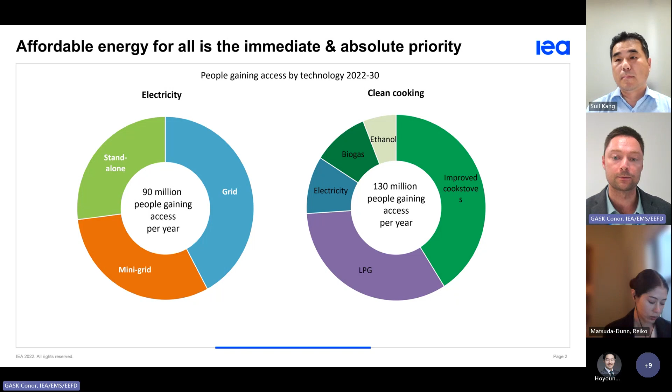Achieving full access to modern energy in Africa by 2030 would require investment of $25 billion per year. This is comparable to the cost of building just one large LNG terminal. Current investments fall far short of these levels. In 2019, for example, this amounted to just 13% of levels needed to meet the goal by 2030. Ramping up access to investment requires programs on the ground to mobilize a large number of smaller projects, which individually are difficult to fund.

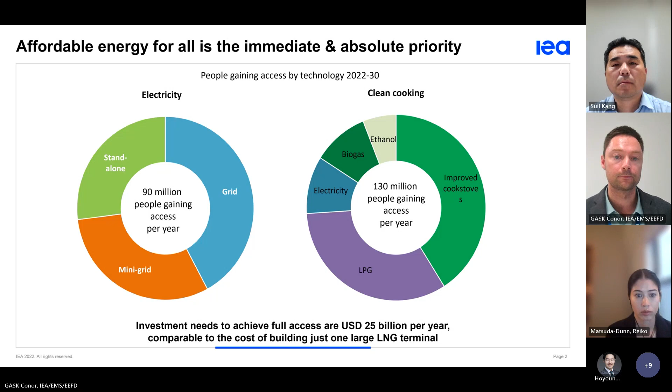Looking at growth in electricity demand over the coming decade, Africa is set to experience an unprecedented increase in energy demand, driven by rapidly growing economies and populations, rising incomes, and significant infrastructure expansion. Energy demand in industry, freight, and agriculture is expected to increase by almost 40% by 2030. As climate change and urbanization drive up the need for cooling, electricity demand for household appliances could more than double by 2030.

Industry accounted for 2/3 of energy demand for productive uses in Africa in 2020, with services made up of commercial and public buildings and desalinization contributing 1/4 of this demand. Total energy consumption for productive uses across Africa rises by 33% based on our projections in the Sustainable Africa scenario, with the use of almost all major fuels increasing in all 3 productive sectors.

Electricity consumption increases significantly in both industry and services, where electricity meets almost half of total energy needs by 2030, and more than 3/4 of the rise in energy use driven by increasing use of electricity for space cooling, lighting, and appliances. The increase in energy use in our scenario is tempered by the adoption of strong measures to enhance energy efficiency.

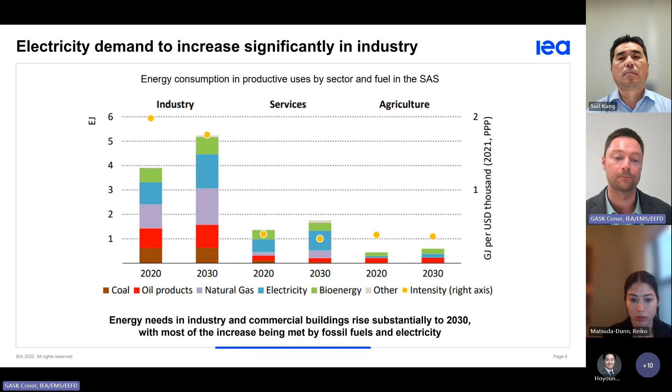Africa's 300 million households accounted for 56% of the continent's total final energy demand in 2020, despite 120 million of these households lacking access to electricity and 200 million being deprived of modern, clean cooking solutions. Over the decade to 2030, the growth in household demand for energy services is set to outpace population growth, as rising levels of access to electricity and rising incomes drive up ownership and use of appliances and equipment, as well as other uses of energy.

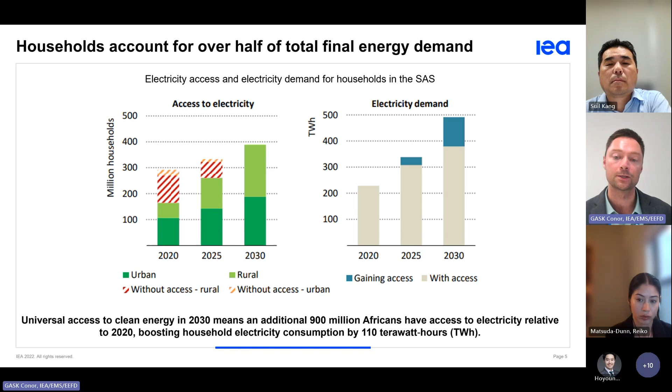In our Sustainable Africa scenario, most of the growth in demand is met by electricity, and its share of total household energy use rises from 6% in 2020 to over 25% by 2030.

Looking at appliances, lighting, and air conditioning and their energy use, rising incomes and expanded access to electricity will drive growth in this sector. We expect that ownership of air conditioners will jump by around 17 million to 40 million, and electric fans will increase to around 340 million between 2020 to 2030. The stock of refrigerators will also increase by over 80 million and washing machines by 20 million.

As a result, electricity demand for these and other household appliances and equipment more than doubles from around 160 terawatt hours to 350 terawatt hours. Growth is fastest in sub-Saharan Africa, with electricity use for appliances and other electrical equipment quadrupling by 2030.

In contrast, however, to total electricity use, average consumption per household that has access to electricity actually falls slightly between 2020 and 2030. This we expect is due to a rapid implementation of mandatory minimum energy performance standards and also stronger building codes across all appliance types and across building sectors in almost all countries on the continent.

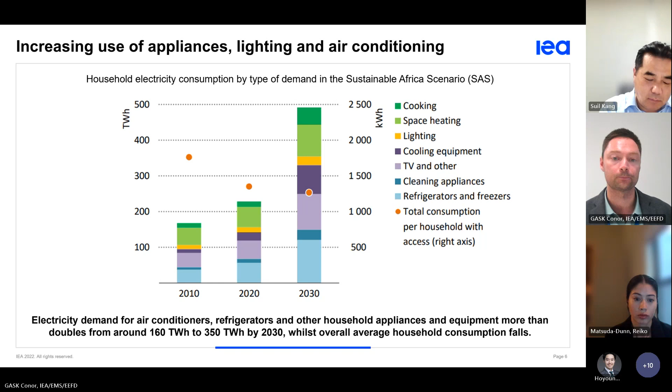Another key challenge which we see in Africa is looking at the resilience and sustainability of the power system. And we have seen growing network losses leading to increased strain on power systems in Africa as well as globally in recent years. Massive investment in Africa's grids is critical to improve system reliability and expand access and facilitate the integration of variable renewables.

Extremely high network losses across Africa, which averaged around 15% in 2020, were almost twice the global average of 8%. And countries often lack the tools to monitor the condition of the grids and to accurately assess the location, duration, and cause of blackouts or brownouts.

Reliability is particularly important to attract industry and investment in industry, as African enterprises experience power interruptions of more than 50 hours a month on average in 2018, a loss of 25 days of economic activity per year. So addressing power system sustainability not only can improve the economic growth, but also can improve the investment prospects for industry in the future in Africa.

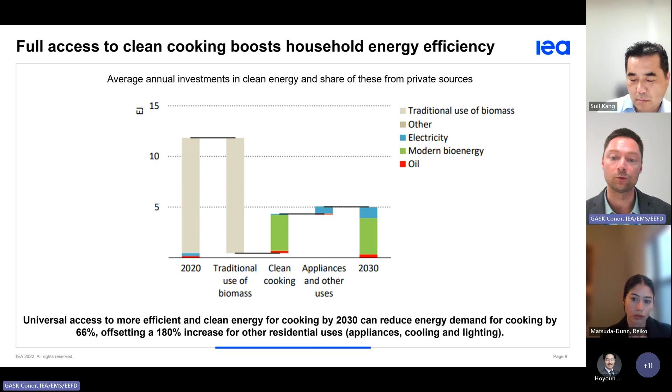Another area which the IEA has been looking more to in recent months is clean cooking. The traditional use of biomass dominates residential energy demand in sub-Saharan Africa today, with more than 80% of the population reliant on it. Universal access to more efficient and clean energy for cooking by 2030 in the Sustainable Africa scenario reduces total residential energy demand in sub-Saharan Africa, as efficiency gains more than offset the overall increase in the underlying demand for cooking. Energy demand by 2030 could drop by 66%, more than offsetting an increase in use for other residential uses, such as appliances, cooling, and lighting.

One of the key challenges we have seen is investment in energy efficiency in Africa, which in the past has been overlooked. We believe that energy efficiency needs to play a key role in Africa's energy economy as demand expands, but it is not yet getting enough priority. Energy efficiency spending increases 7-fold by 2030 in our Sustainable Africa scenario, in areas such as efficient green buildings and consumer appliances like refrigerators and air conditioners.

Increased investment in industry as well will also be critical to reducing overall energy demand. Investment in energy efficiency, electrification, and renewables for end use in Africa has been relatively static for more than 5 years, accounting for slightly below $6 billion in 2022.

While several countries in Africa have put in place building codes and minimum energy performance standards for certain appliance types, there is still a lack of an integrated and comprehensive policy framework in many cases. In 2022, for example, MEPS and labels for air conditioners covered around 50% of final energy consumed by all such equipment in Africa, and refrigeration stood at 60%, compared to a global average for both of around 90%.

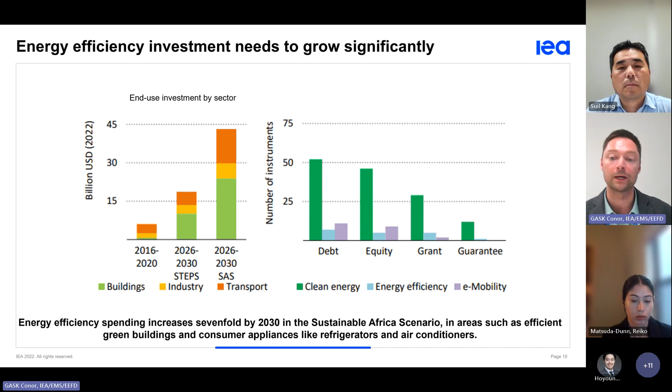Finally, we see reliable and robust grids as a key missing piece of the puzzle in driving Africa's clean energy transition and decarbonising on the demand side. Electrification of end uses and changes in demand, coupled with increasing shares of variable renewables, are creating pressures for advanced economies, emerging markets, and developing economies alike.

Due to underinvestment, electricity systems globally face a myriad of challenges, including inefficiencies, losses, congestion, and outages. Climate change is causing further damage to assets and affecting reliability. We see that grid investments rise from around $10 billion per year today to nearly $50 billion by 2030 in order to meet sustainable goals, requiring new financing models that are less reliant on limited state funds.

Many African state-owned utilities struggle with poor financial health and high system losses, which average 15%, as I mentioned before, almost double the global average. As a result, they are unable to finance the necessary expansion and modernization of grids that the influx of renewables requires. This includes expanding digital and smart solutions, which will be critical for driving decarbonization in high energy consuming end-use sectors, such as buildings and industry.

Alongside efforts to improve the financial health of utilities, achieving the spending increase is likely to rely on grants and highly concessional capital to develop pilot models that shift some of the financing to private players. Countries such as Kenya and Uganda are already testing innovative concession or brownfield asset refinancing approaches with the support of development finance institutions, which could serve as models for elsewhere on the continent if successful.

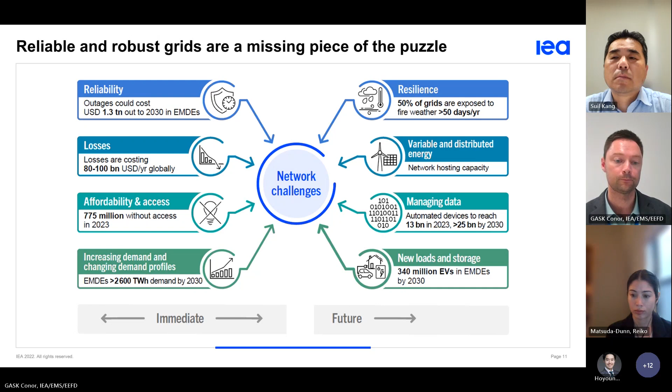Finally, again, I would like to thank everybody today for your attention, and I look forward to answering any of your questions. Thank you very much.

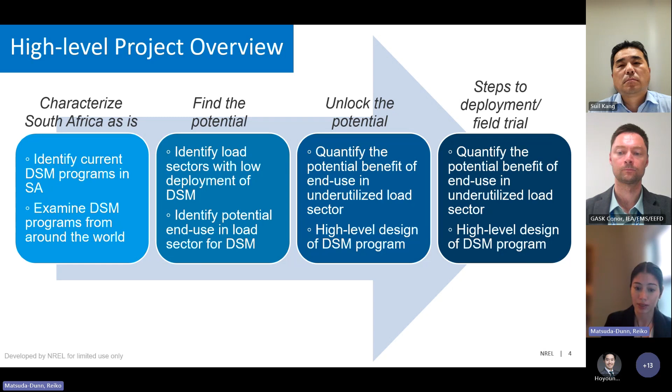And then we have demand response. There are a lot of different categories of demand response: dispatchable, non-dispatchable, controllable, and this comes down to the level of direct control that an operator can have over these different technologies.

Part of the challenge of identifying new DSM applications in South Africa is that so much effort has already been put into this work to date. So our approach of systematically defining DSM solutions helped us to be sure that no stone was left unturned in our work.

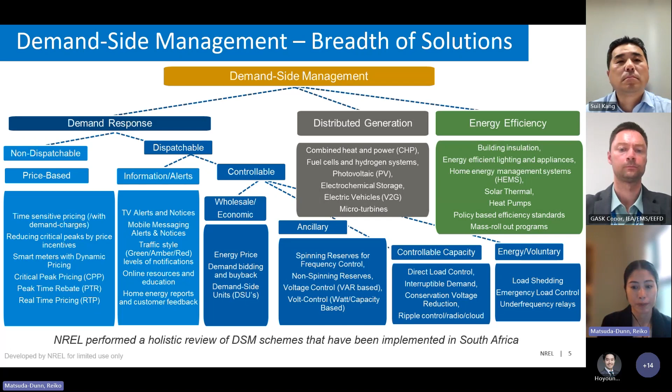I've already provided a little information about the challenge, but South Africa is facing capacity constraints that have been leading to load shedding, or widespread service shut-off to customers, also known as rolling blackouts. Some may be asking why this extensive effort into DSM implementation -- this is a supply-side problem, but DSM can help to alleviate this imbalance of supply and demand.

Demand-side management can help reduce the peak demand. It can shift the load to flatten the profile. It can achieve energy efficiency, reducing the strain on the system during these peak hours.

South Africa, as I mentioned before, has already had a large DSM program. A lot of this work has targeted large industrial customers, so that's an area where a lot of effort has already been applied. What we've identified is that small and medium customers and domestic customers may have untapped potential for DSM programs.

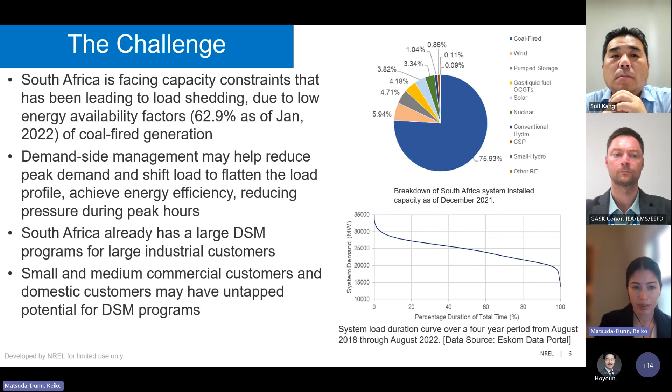Moving forward into load shedding -- my slides have a little delay here, so apologies for that.

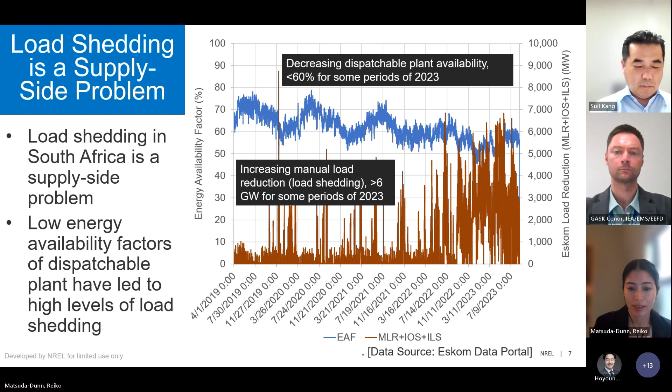On my next slide, I'm going to discuss some of the untapped potentials we identified on the demand side as it advances, including some of the energy efficient technologies.

We identified water heaters as driving peak demand in South Africa. Some solutions to address water heaters as an end use include expansion of ripple control, which was already implemented in South Africa. The current capacity for ripple control is around 200 megawatts, with potential of over 2 gigawatts. Solar thermal technologies could reduce electricity consumption by 40 to 60%.

The challenge there is some solar thermal water heating has an auxiliary element, which could actually increase consumption -- it's difficult to quantify that amount. Timers on devices could help shift the load away from winter peaks, and heat pump water heaters could reduce electricity consumption by nearly two-thirds.

Nighttime storage heaters could shift the peak, but they are not, in fact, energy efficient. They are only peak shifting, so they consume more energy in the evening to then heat the home during the day.

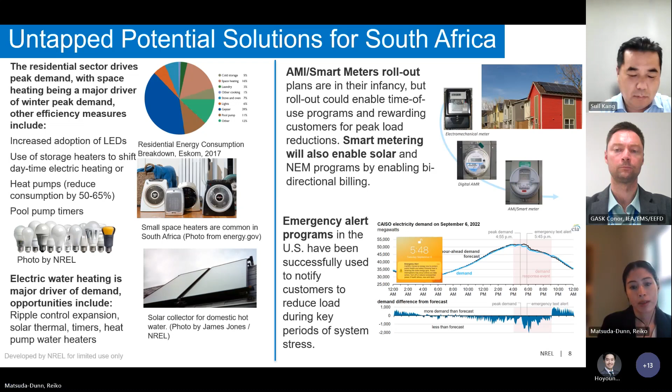All right, so on the next slide, I'm going to talk about load shedding as a barrier to DSM programs. So load shedding has the challenge of reducing the benefit of other DSM programs. You cannot implement both at the same time. There cannot be a benefit from a DSM technology if that portion of the system in which it's deployed is load shed. You can't have both.

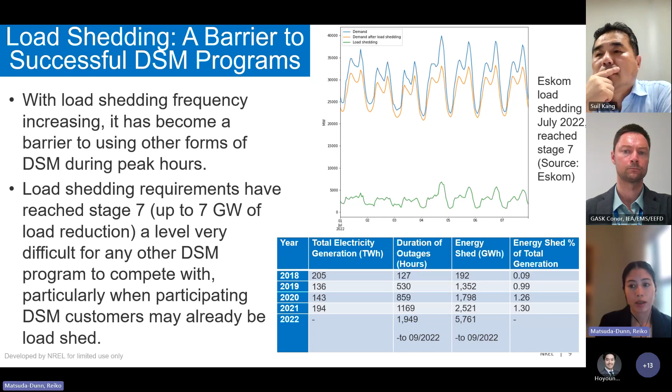So while we have this potential benefit of DSM programs that we identified in our work, up to 2 gigawatts, none of them can compare to the amount of capacity that load shedding provides, which was nearly 7 gigawatts in 2022. So here we just have the degree of load shedding that is occurring. In July, it was kind of constant for up to 18 days, coming up to 7 gigawatts. So the extent of load shedding that is currently being relied upon cannot be overemphasized. So we had nearly 4,000 hours of load shedding in 2022, which is about 43% of the year. So the takeaway is that load shedding is not going anywhere in the next few years.

The challenges of current load shedding are that it's performed by the municipals and Eskom. Eskom is the primary transmission system operator and generation owner. Load shedding takes place at the feeder level. So on a feeder are possibly thousands of customers. Entire communities are load shed. There is no means of isolating critical infrastructure, such as hospitals or other services that can really improve quality of life for the people on that feeder.

So the impacts of that is that those critical loads are shed. Customers are locked into blocks of being load shed or without service for hours at a time. We've got 4-hour blocks at the moment. The comeback load on each of the feeders upon re-energization can cause issues. So it's not always easy to just re-energize the circuit after it has been load shed because of that large load. And then theft of electrical equipment is high when the feeder is de-energized. So during these load shedding times, that's an opportunity to actually steal distribution transformers and the copper in them. And then that circuit can't come back online right away without that service.

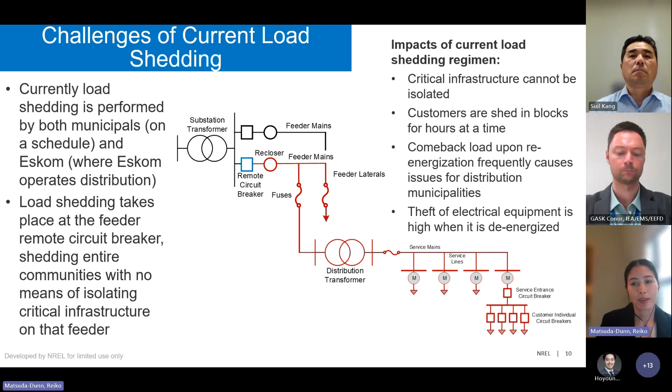So our proposal is to use targeted demand response to reduce load shedding impacts. So surgical or targeted demand response is about de-energizing at a more granular level, so at the customer level. This is something that has been done in the US or has been implemented with AMI rollout. So most AMI meters are equipped with AMI remote turnoff, so they can shut service off and restore it remotely. But it doesn't necessarily rely upon AMI. This could also be done with smart circuit breakers and appliance level relays.

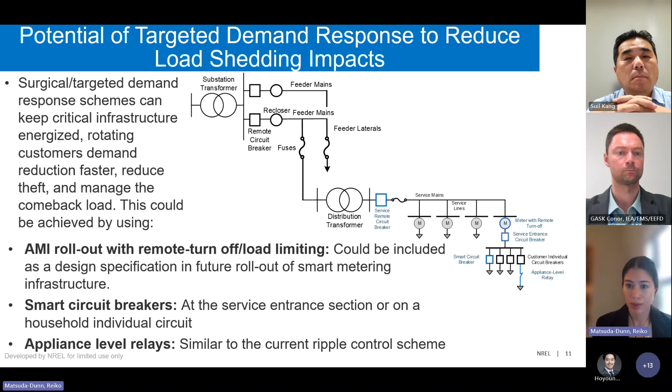And the advantage of this is that you can isolate critical loads and maintain service to those critical loads. You can rotate customers faster, and you can introduce some geospatial diversity. So as a customer, you might have an option of going to a nearby premise that has energy to find heat or cooling, those critical services that you might need. This also alleviates the comeback load issue because you can stagger customers a bit more. And then finally, that customer rotation could be 15 minutes as opposed to 4 hours. So being without power for 15 minutes is preferable to hours on end.

So to quickly summarize, supply side solutions are critical to addressing the current energy crisis in South Africa, but demand side management programs can help customers and alleviate the system strain. Energy efficiency in particular can benefit customers through reducing consumption and therefore their bills. So these are efforts that we think are important and should be continued, but they are well understood. So that's why our work has focused on these smart dispatchable loads.

These programs, they're great, but they will not provide benefit to the country unless they are designed as an alternative to load shedding. And targeted demand control can provide benefits as an alternative to load shedding. So targeted surgical demand response could be enabled through AMI or smart metering infrastructure, which has multiple stacked benefits. All the benefits of AMI can come if you can create this rollout at the same time as targeted demand response.

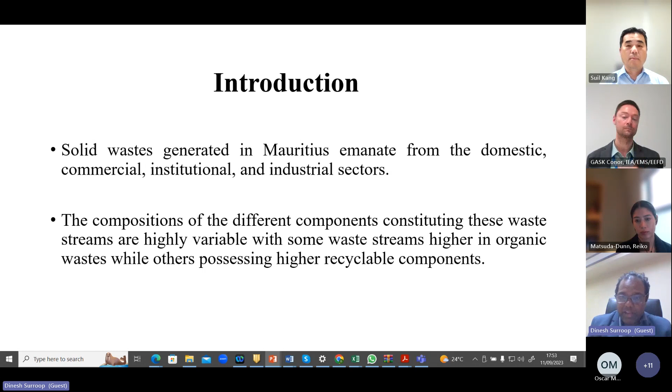So solid waste generated in Mauritius emanates mainly from domestic, commercial, institutional, and industrial sectors. The composition of the different components constituting these waste streams is highly variable, with some waste streams higher in organic waste, while others possess a higher recyclable component. Just for information, before we started this TA, we had already conducted at the university another study on the characterization of the municipal solid waste in Mauritius, again for the Ministry of Environment. And the findings from that study were very helpful for undertaking this project. So the findings were as follows.

And the DOC, degradable organic carbon, is 0.15 gigagram carbon per gigagram waste. So this was the finding from a previous study. And from that study, the way forward was to come up with several options for managing waste. Obviously, one can be waste to energy, direct combustion, but it also can be anaerobic digestion, production of biogas.

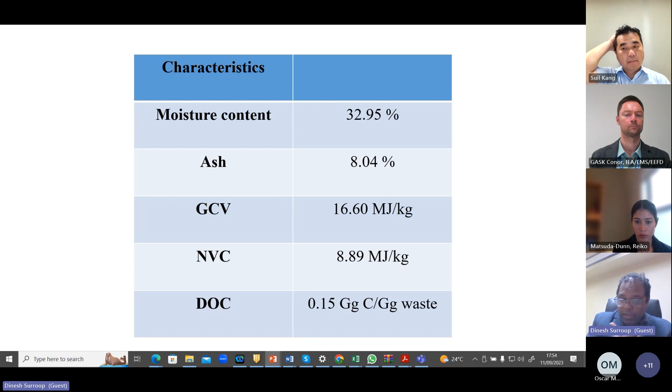And this TA came in a very timely manner, because here we had to analyze the current value chain for organic waste across collection, transport, treatment, and disposal, quantification of biogas and energy production potential, identification of appropriate technologies and processes for anaerobic digestion, and eventually a cost analysis to see if this kind of project is feasible or not.

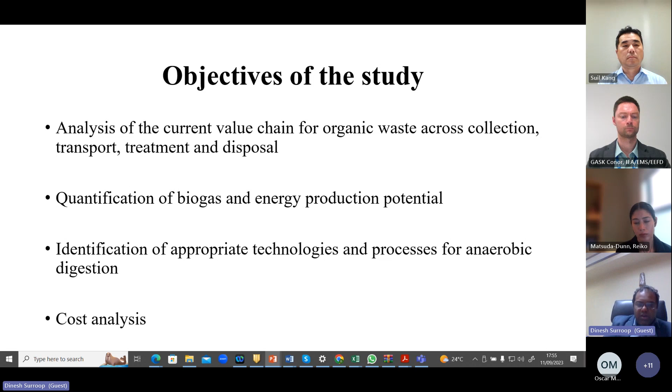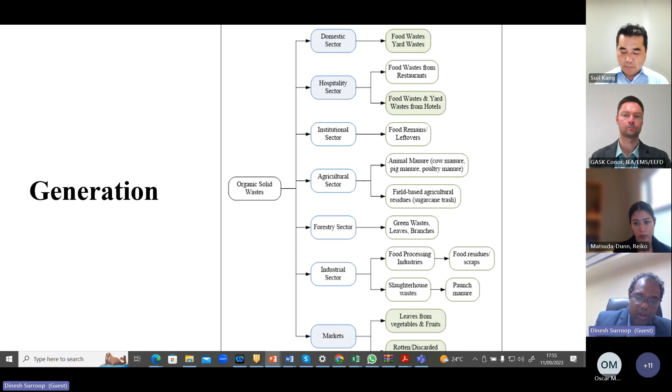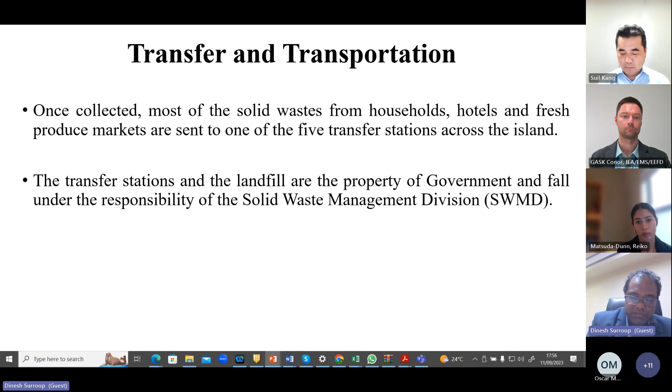Once the waste is collected, it is transported by the local authority to the transfer stations. We have 5 transfer stations in Mauritius, and in those transfer stations the waste is compacted, and from there the compacted waste is transferred to the only landfill that we have in Mauritius. The management of the transfer stations, the transportation to the landfill and the management of the landfill is taken care of by the government, under the Solid Waste Management Division, which falls under the Ministry of Environment.

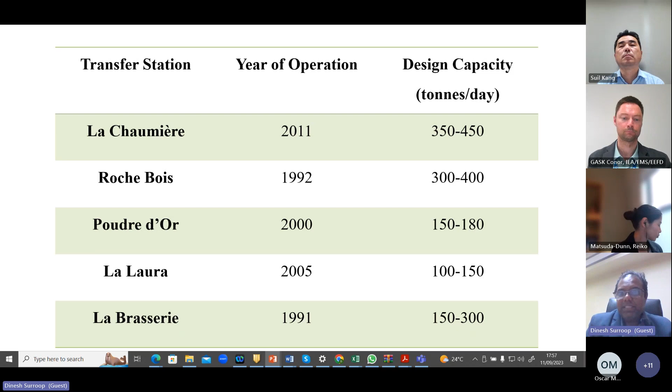The capacity of the transfer station ranges from 100 tons per day to 450. So you can see the years of operation and the design capacity on this table. So the latest one is La Chaumière, which has a capacity of 350 to 450 tons per day.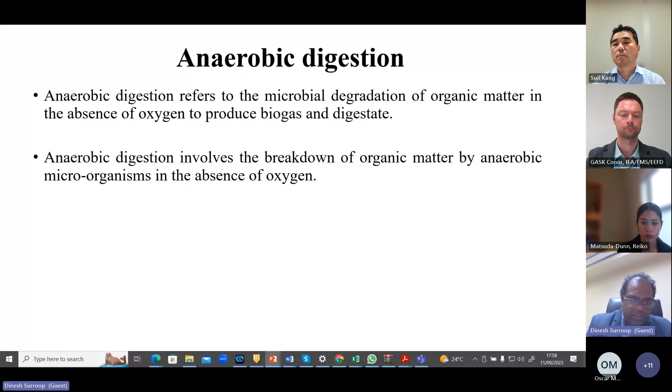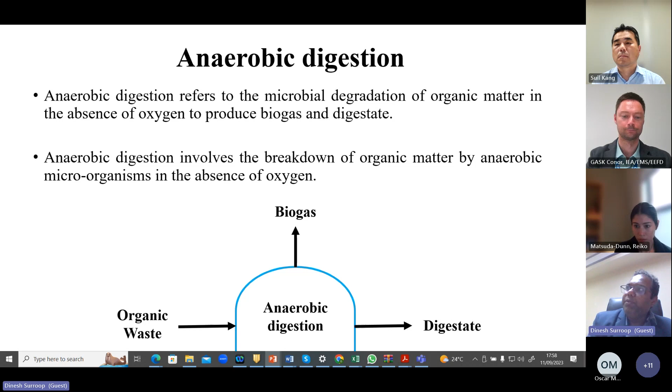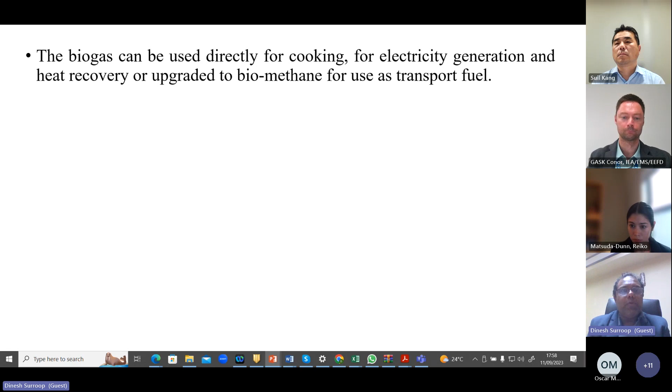So basically, it's a process where you have organic waste coming in. You have bacteria that degrade that organic matter into biogas, and the biogas can be used as a source of energy. And you have the digestate, which can be used for composting as fertilizer. So the biogas can be used directly for cooking, for electricity generation and heat recovery, or even upgraded to biomethane for use as transport fuel, whereas the digestate can be used as organic fertilizer or composted with fresh waste.

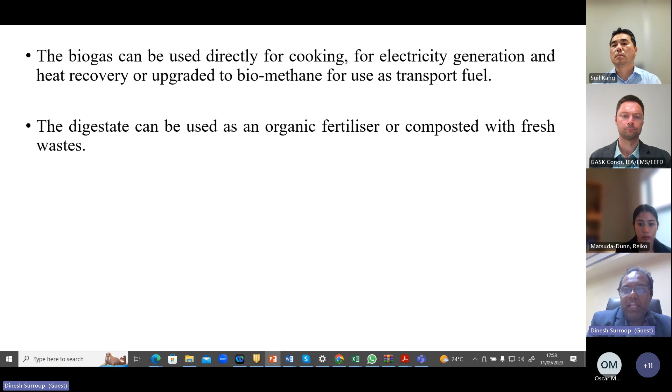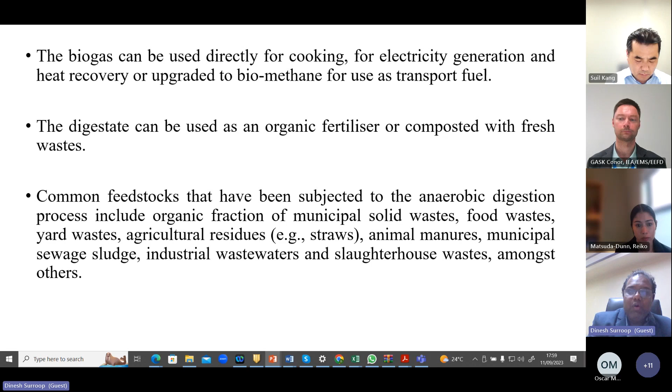So common feedstocks that have been subjected to the anaerobic digestion process include the organic fraction of municipal solid waste, food waste from hotels, restaurants, yard waste, agricultural residues, animal manures, municipal sewage sludge, industrial wastewater, slaughterhouse waste, among others. But in this study, we focus on the organic fraction of municipal solid waste, the food waste, and the yard waste.

So the next thing is, what type of technology are we going to use for the anaerobic digestion? The technology varies. We have technologies that are on batch operation, that is single stage batch system or multi-stage batch system. We also have many on a continuous basis: single stage low solid system, single stage high solid system, multi-stage low solid system, and multi-stage high solid system.

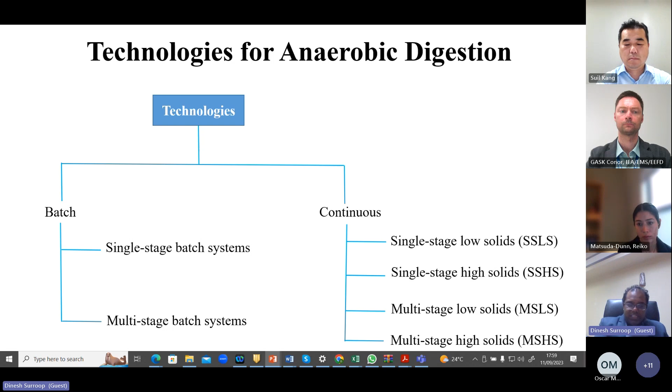The next challenge is to determine which technology is more appropriate. And for this, we have used tools like multi-criteria decision analysis, MCDA, using the simple multi-attribute rating technique. And here we have a series of attributes or criteria that were used to allow for the selection of the most suitable anaerobic digestion technique in Mauritius. And each criterion was also assigned a weight based on its importance as opposed to the other criteria.

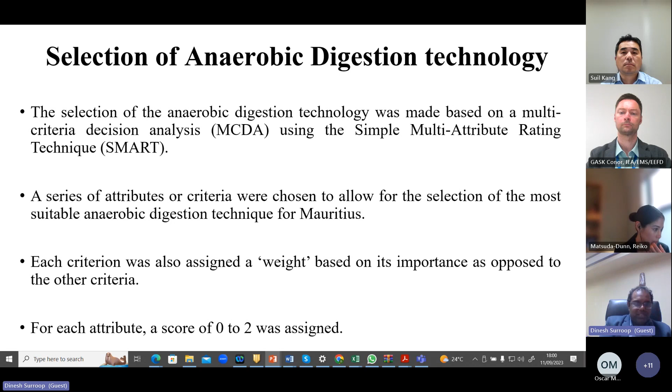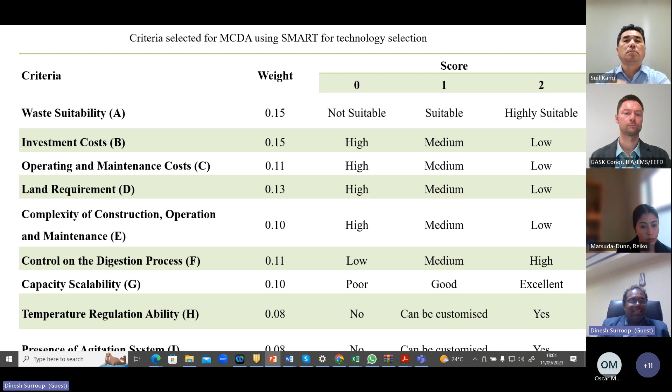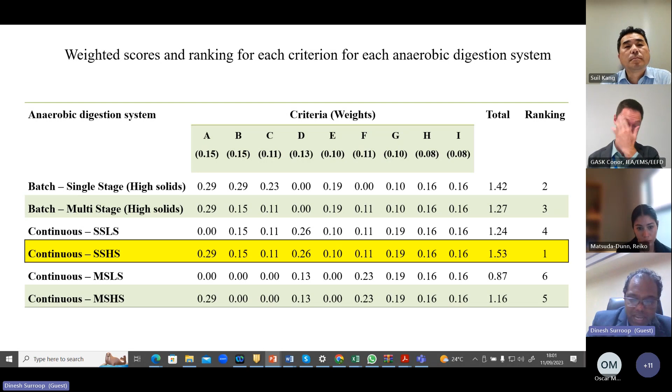And when it comes to the types of systems, these are the 6 systems that we have used. And eventually, together with the main stakeholders, we have found that the continuous single stage high solid one is the best for the country, for the island, and therefore this kind of technology was selected. So basically, the single stage high solid is the most appropriate one, and the digester systems that are commercialized under this type of system are the Dranco process, Kompogas, and Valorga process. So here we are done with the type of technology.

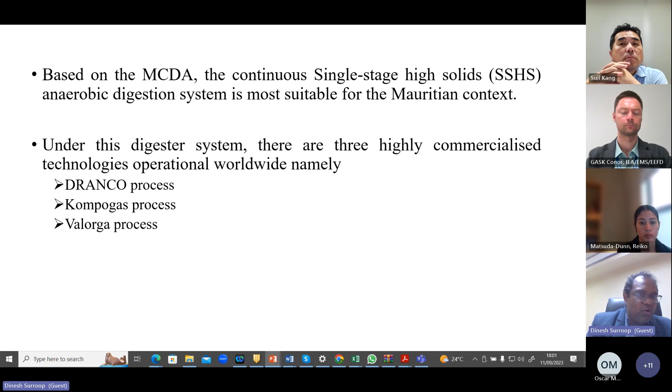The next step was to determine how much energy or product we are getting and how it is in terms of economy. So the TA was made for a capacity of 100 tons per day, 100 tons of organic fraction of municipal solid waste per day. And the electricity generated annually was found to be 14 gigawatt hours. And we have taken an example cost of electricity of 3.5 Mauritian rupees per kilowatt hour. And based on this, we get a revenue of roughly

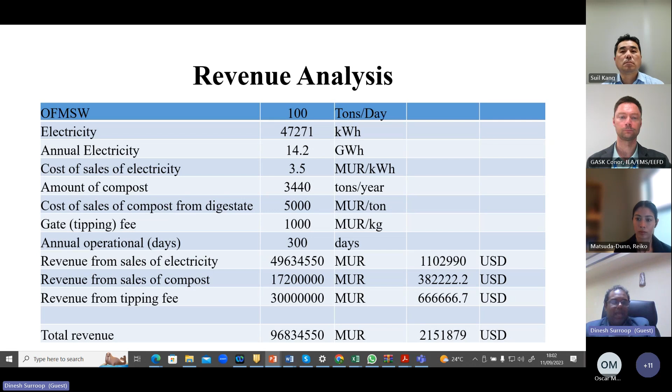2.1 million USD. Now, it is important to know that the revenue comes from the sales of electricity, the sales of compost, and the revenue from tipping fee. So if you look at this table, which gives you a much better indication, we have revenue basically from sales of electricity and compost, but we had to bring in the tipping fee in order to make this project feasible.

Business as usual, when waste is coming to landfill, there is a cost associated with the management. Now, if we are diverting it from landfill, I think this amount of saving can be used to fund the tipping fee. Now, we have tried to see what are the different scenarios to make the project feasible. So we have made a sensitivity analysis on the selling price of electricity. So option 1 was a cost of 5 rupees per kilowatt. Option 2 was 4 rupees per kilowatt, and option 3 was 3.5 rupees per kilowatt.

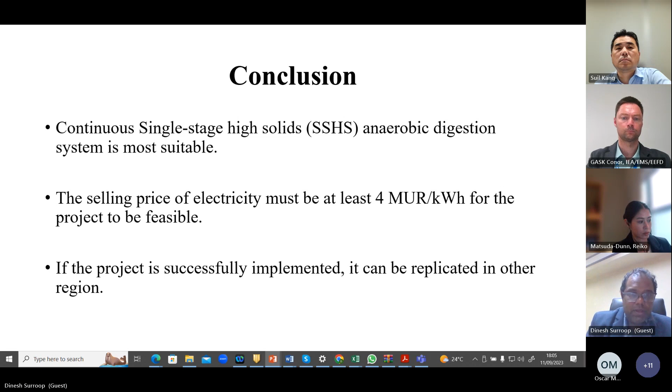As it is now, the ball is in the court of the authority when it comes to implementation. The project has not yet been implemented, but we are looking forward for them to go ahead with the implementation. Once it is implemented, we can replicate this kind of project in other regions. Thank you very much for your attention. If you have any question, I'm happy to answer. Thank you.